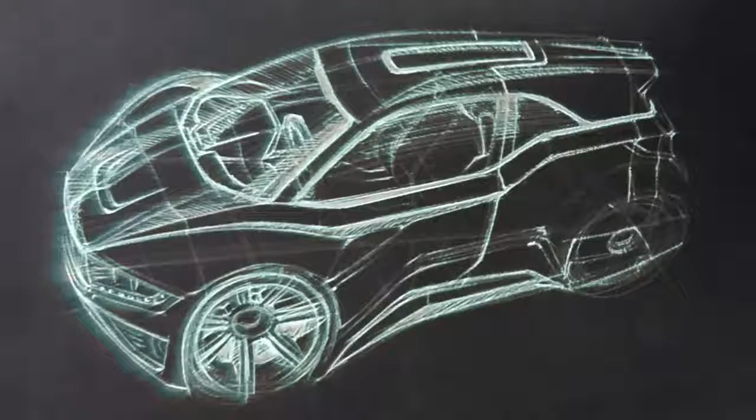When he brought the concept of a single passenger, three-wheeled commuter electric vehicle to me as something that he was interested in pursuing and asked me what I thought, it was brilliant.

If you look at the numbers, there's not a lot of competition in electric cars. There's still a bajillion gas cars being built. The electric car is like the internet, and a gas car is like a fax machine. Once you drive it, you get the difference.

We knew right away that if we were going to try to meet any kind of timeline, there was never a chance that we were going to be doing this on paper. This had to go from stylus sketch into a digital design immediately. We weren't told that automotive firms have 200 engineers in a room and it takes them a year and a half to design a taillight. We just designed the whole car.

This car had to hit the ground and actually function. It had to perform like we expected it to. The suspension had to perform, the drivetrain had to perform. Rich was brought on a little bit later in the process to do finite element analysis, chassis design and development.

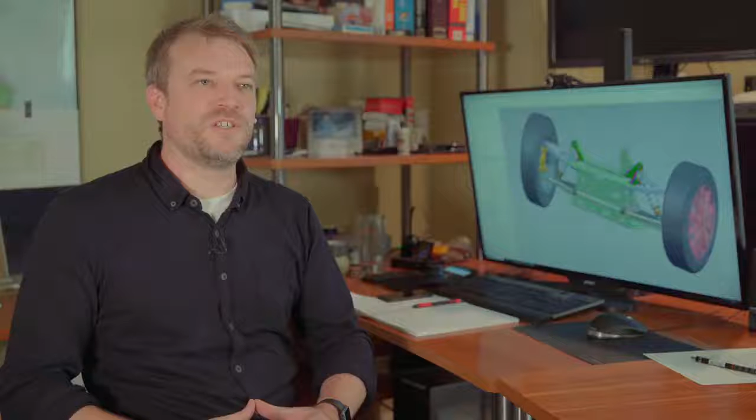What we're looking at is a totally different way of thinking with these smaller companies and the way that they're approaching problems. They have smaller budgets, but they have more nimble teams. And what they're looking at doing is getting tools which enable them to achieve engineering excellence on small budgets with small teams. Tools like NX, SimCenter allow them to do that.

So we have 75,000 of those cars coming out in the next 3 years, and more manufacturing people that we're reaching out to, top-level manufacturers. When I speak to a top-level manufacturer and I tell them what software we have our car fully designed and engineered on, it makes my life and their life a lot easier to deliver those cars to consumers.

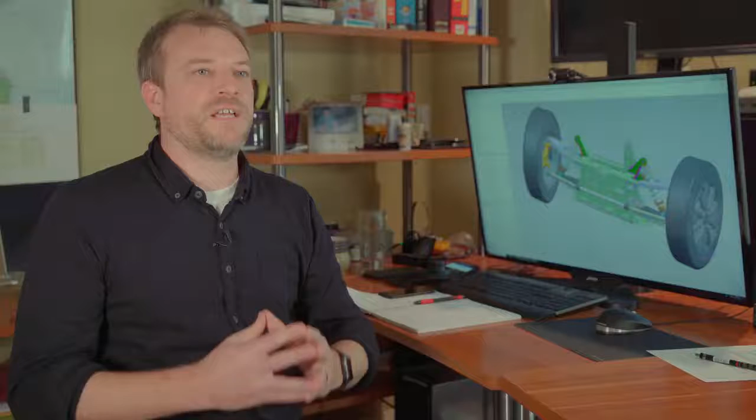So that manufacturing provider in China, Zongshen, is also using NX as the primary tool for the design. So they will take our design, evolve it slightly for high volume production, and look at all the different moldability, formability requirements that they have for their mass volume production.

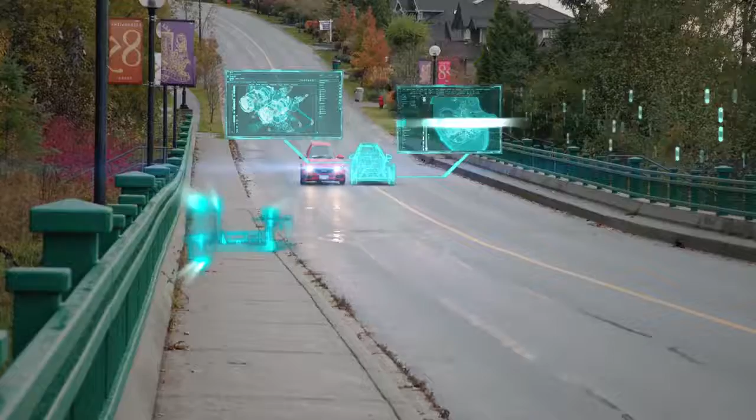We're actually able to talk to our vendors. We're able to talk to our engineer in Michigan, and he's able to talk to Tammy here in our office, and we can talk everything from mechanical bits to electrical components to wiring diagrams and everything else.

With SimCenter, we have a direct parametric link back to the CAD data, all in the one GUI. So that means that we can analyze the design, work out, hey, can we move this? Can we reduce some mass here? Go back into the design, iterate it, 2 clicks, and we have our results updated.

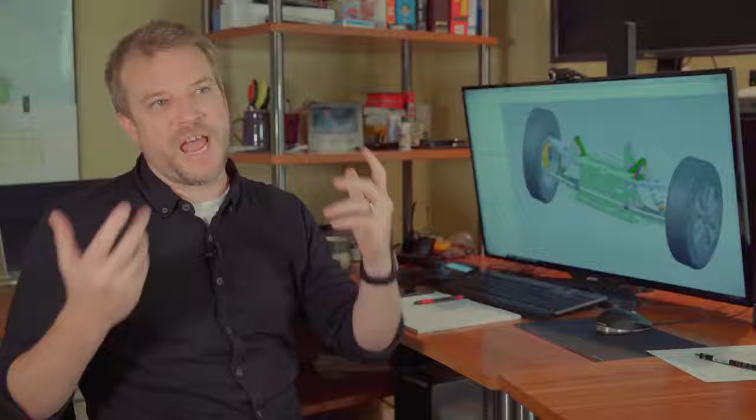These are things that were new to ElectraMeccanica before we started working with Maya and Siemens and pulling this in. But we brought in some fresh scrubbed young engineers in mechatronics, mechanical engineering, electric engineering. Tammy and the team have done a fantastic job of pulling in what they know, what Henry and I didn't know. They said, oh, if we can get this software, this is going to be awesome.

Faster to market, less chance of error, better value for the end buyer of the car. Maya and Siemens can provide us the tools to make your company great.

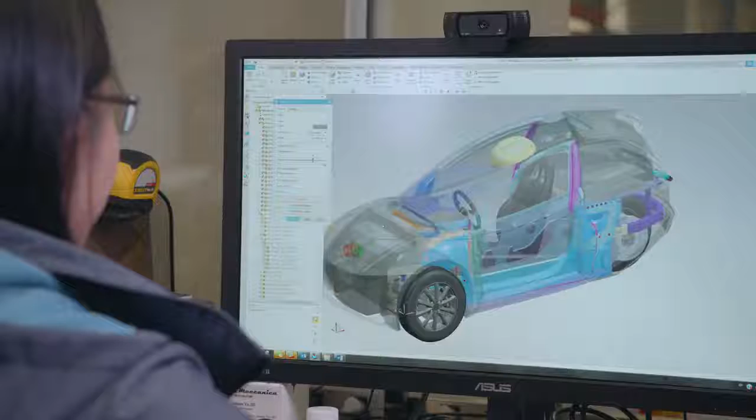SimCenter helps a lot with certification, predicting what might go wrong, helping us accelerate the process. If we have all the assemblies, send it out for testing, and then come back with feedback that it failed, that would be about 2-3 months if I do analysis on it. And it took me about a week or 2 weeks of setting it up, and that's way quicker, way faster, and saves a lot of time and money.

With Siemens and the 3D printer, we can design it, print it out right now. We can get it the next day, maybe 2 or 3 hours later, and then put it in the car, try out if it fits.

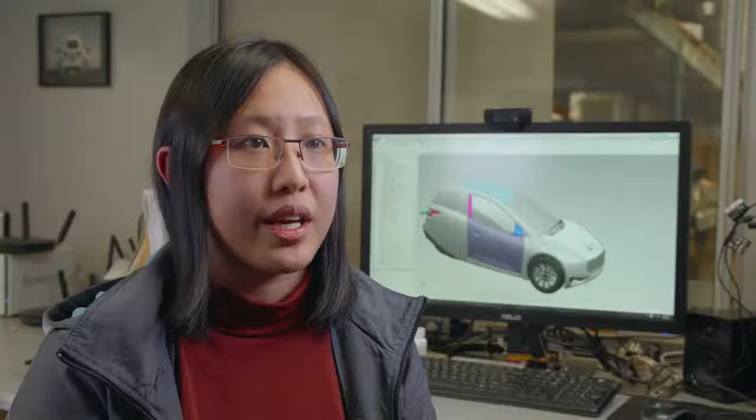So we'll generate our parametric toolpaths here, which is another benefit to keeping everything inside of the one system, have it fully parametrically linked into our CAM software, which is inside of NX as well, and then straight to our CNC machining center.

The engineers that we're using at Electromechanica are so inspired that we can sit around, come up with an idea, or even they're coming up with an idea, or Henry's come up with an idea, boom, it's ready to go. That's awesome.

You're literally unleashing the potential of the human being to not just think of a solution that will work, but create it. And there's magic in there.